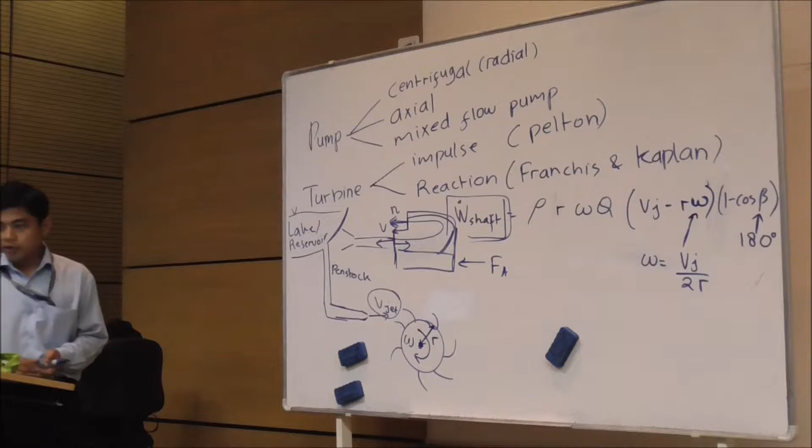Question until this point? If no question, you will see in the slide there is an example. So I will work on that example.

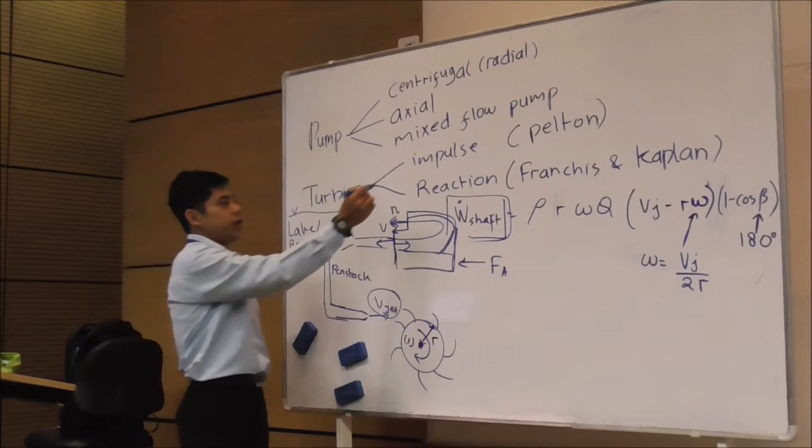Okay, on the impulse turbine. Remember we are still dealing with this. This we will consider in the next class - reaction and Francis.

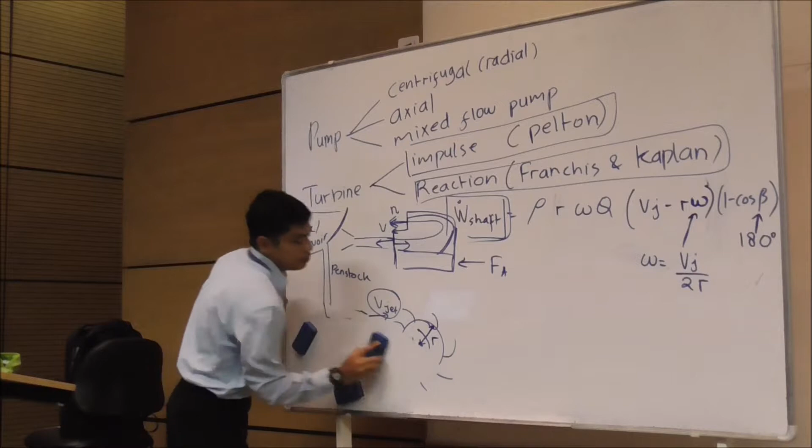Now when we are dealing with the impulse turbine, we will still be using the so-called extended Bernoulli equation. We will still be using it. I have a big whiteboard there. Why am I still using this one?

Now the question is: you have an elevated lake. If you go to Ulu Kinta, there is one big water catchment, what do you call it?

Reservoir by LAP. The head difference between the lake and the processing facility is 100 meters, right?

And then the Q is roughly about, they said, 2 million - very big, some million meter cube per day or something like that.

My rough estimation, if we can generate electricity on that thing, you will get roughly about 30 megawatt, which is more than enough to drive the facility of that LAP, right?

But then, when I ask them why they don't install the power plant, they say because they do not want to involve a mechanical system that may have issues, because when you are having a mechanical system, you have a grease, right?

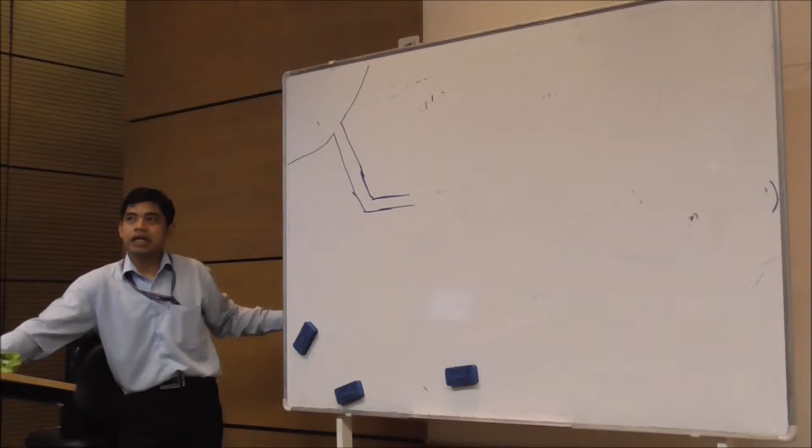Very high - if you look at the 100-meter high, it's very big. And also the flow rate that is distributed by those LAP to all of Perak is very big. So if you can utilize that energy, you will be rich - I mean, the overall Perak.

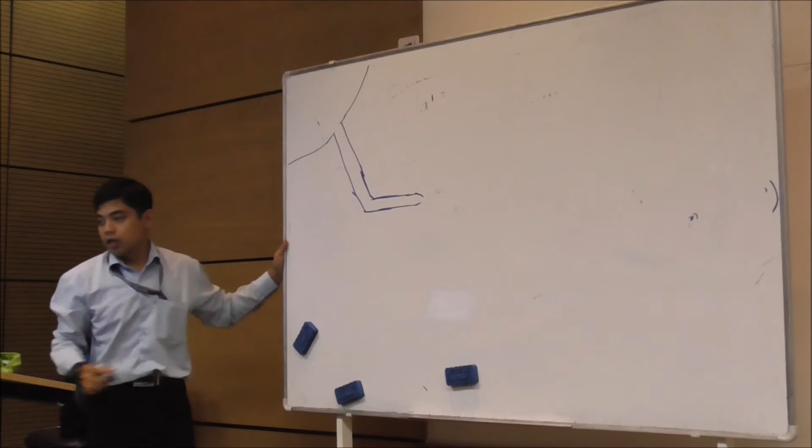Anyway, so this is what you will have. You have an elevated reservoir. The Z here is 60 meters.

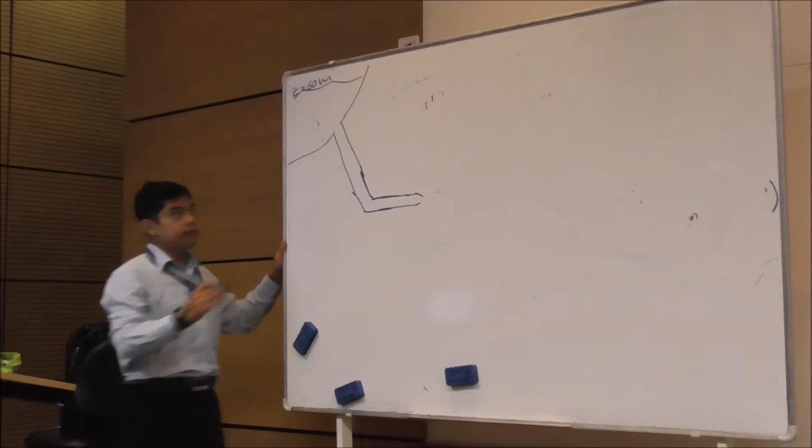The length of this pipe is 300 meters, which is expected. Do not think that when you have a dam, your generator will be next to the dam.

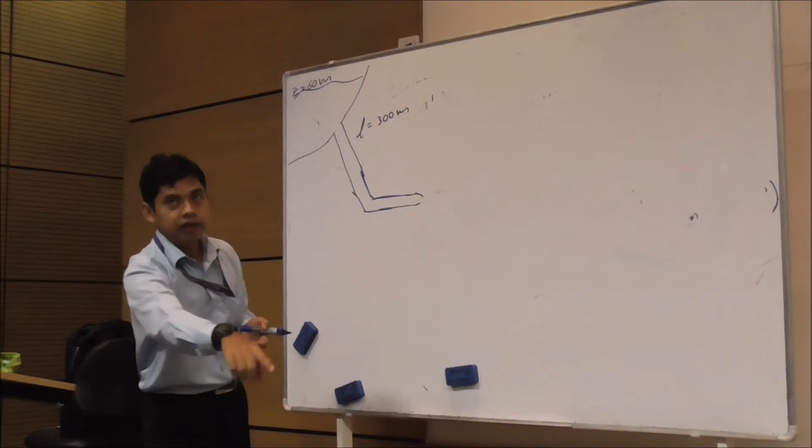No, usually you will have a penstock that drives the water from the reservoir down very far. So in this case, you have 300 meters, and the diameter of the penstock is 20 cm, right?

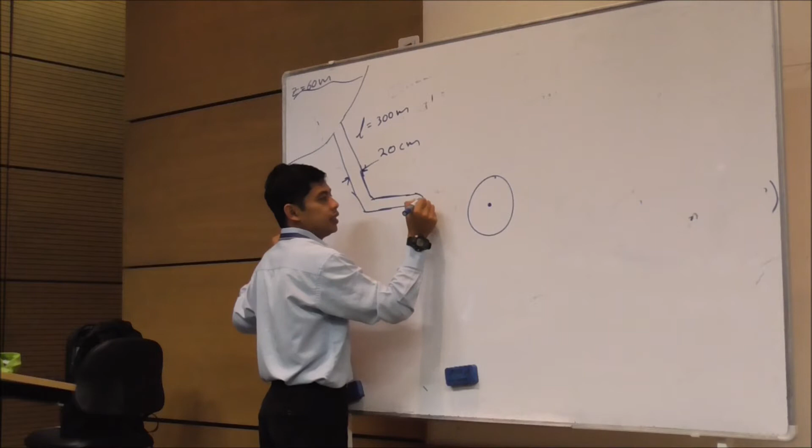And then over here, we take the outlet of the jet as our base elevation. So here you have this one equal to 0 meter.

Okay, so this one is Z1, this one is Z2.

Sometimes the problem given to you is that Z2 is not at 0 meter. This base, this reference elevation, can be some meters, but that doesn't really matter.

At the end of the day, you want to know the elevation difference, not the absolute elevation, right? So sometimes this one is not 0, it can be 10, it can be 12, it can be some value.

Because it depends on the elevation of that location relative to the sea level. Usually when you are talking about the elevation of that location, we consider it based on the sea level, right?

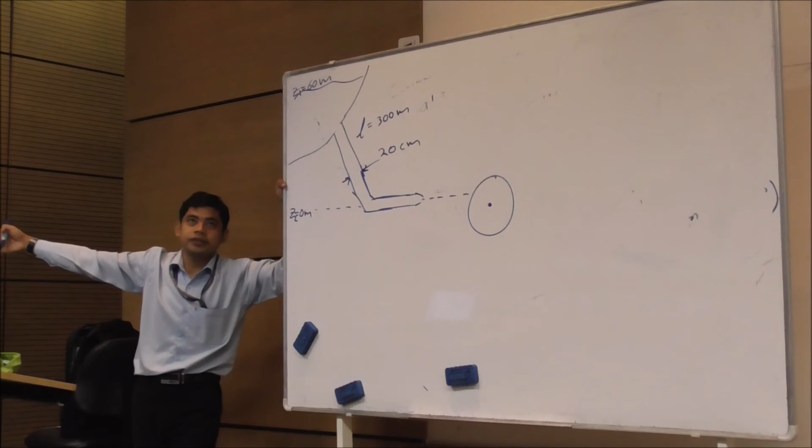Like Sri Iskandar is 300 dpl, above the sea level. Okay, so this can be some number, not necessarily zero, right?

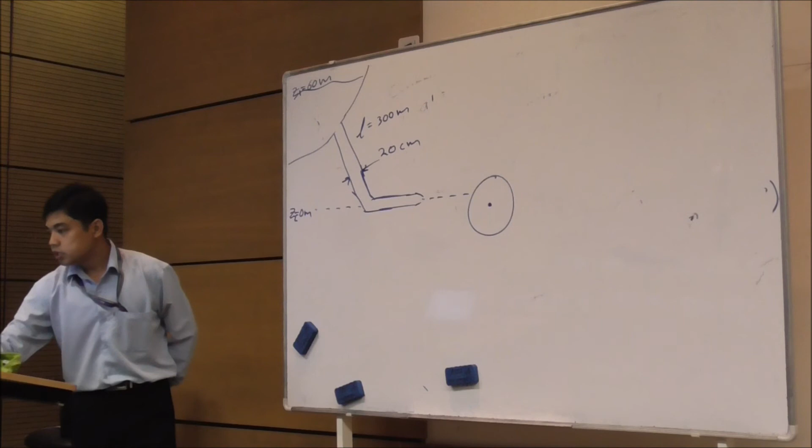But we just need to find the difference between the two. Okay, and then the maximum, or - okay, in this case, actually beta is given.

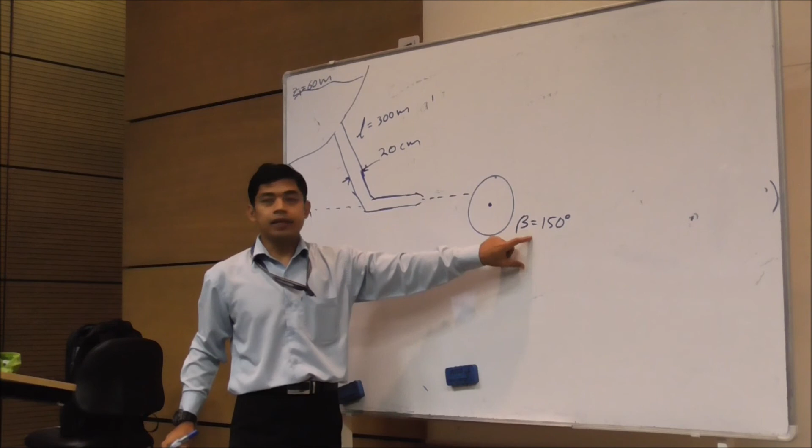Beta is 150 degrees, right? This is the supplier data. The beta is 150 degrees. This is the optimum beta. Okay, and then the diameter 2r, right?

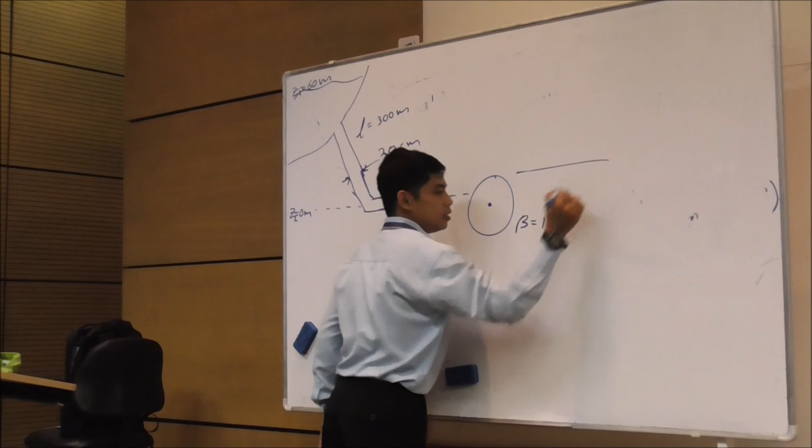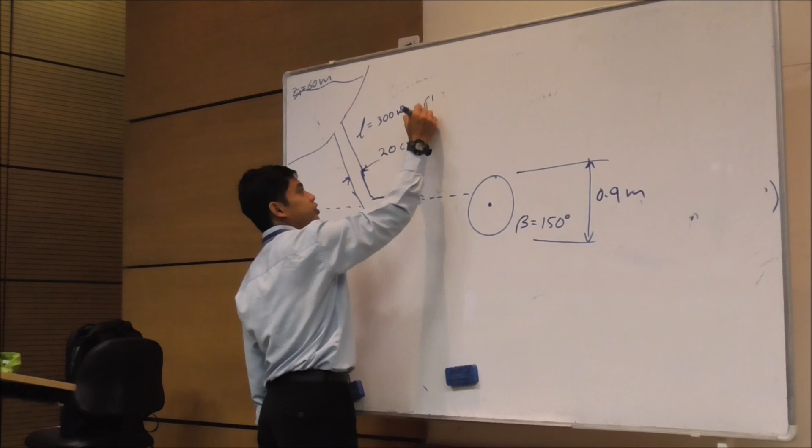The diameter of this, the diameter is 0.9 meter. Okay, and then the friction factor of this is 0.02. Okay, now...